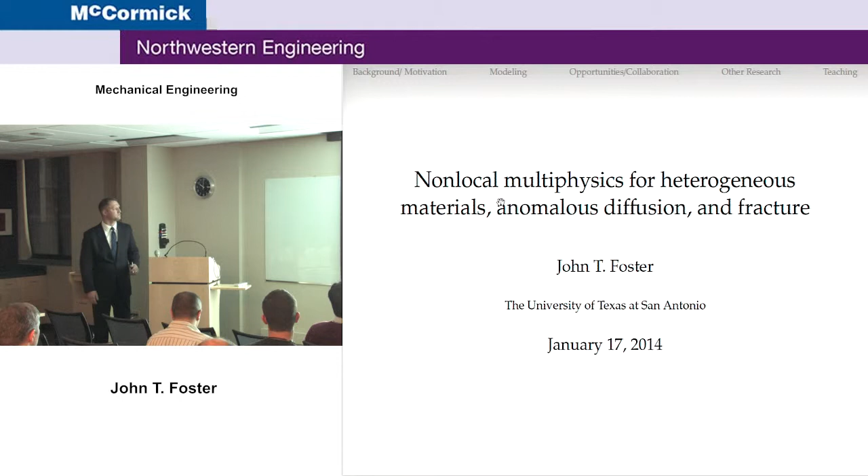I've titled my talk in a way that shows I'm going to focus on the science, but the science is very much motivated by a particular problem, and that's where I'll start. First I'll show the importance of the problem, talk about some of the details we're interested in capturing in our models, and then some of the efforts we're making to do this type of modeling. So that's the outline of my talk.

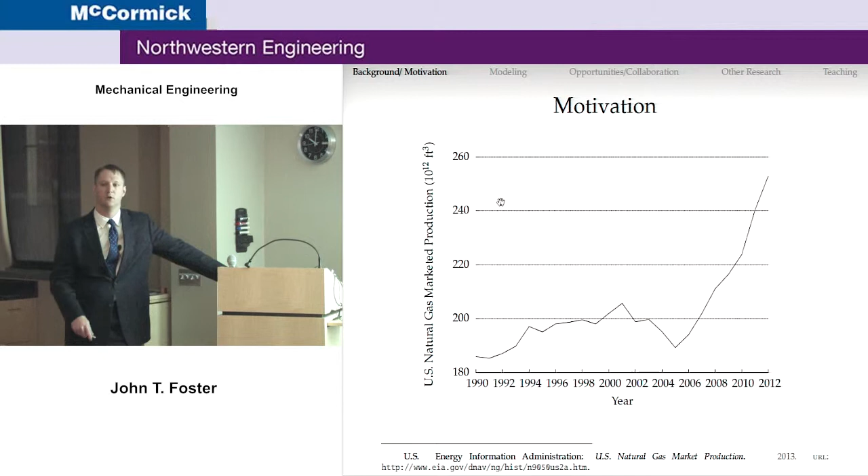The motivation here is this picture of natural gas production in the United States over the last 22 years. You can see this sharp uptick in the mid-2000s, and this is just going to keep going. Another way to look at this is in a picture.

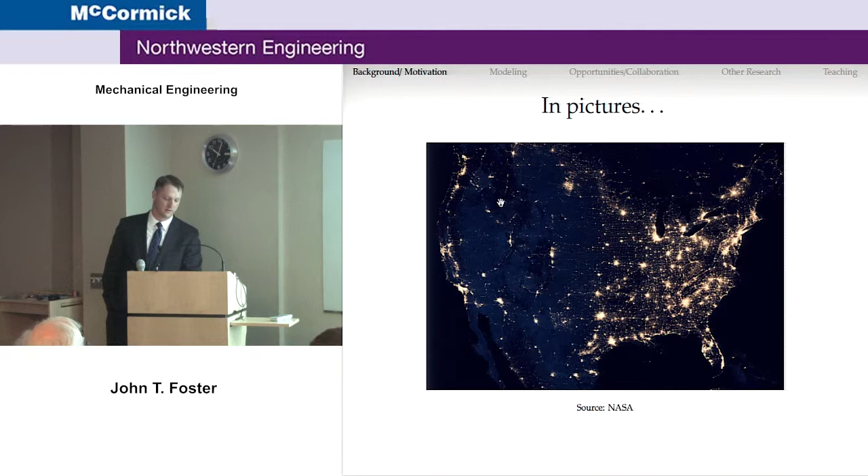So I mentioned shale. Shale is a sedimentary rock characterized by very low permeability. On the scale used in petroleum engineering, they talk about permeability in units of millidarcy.

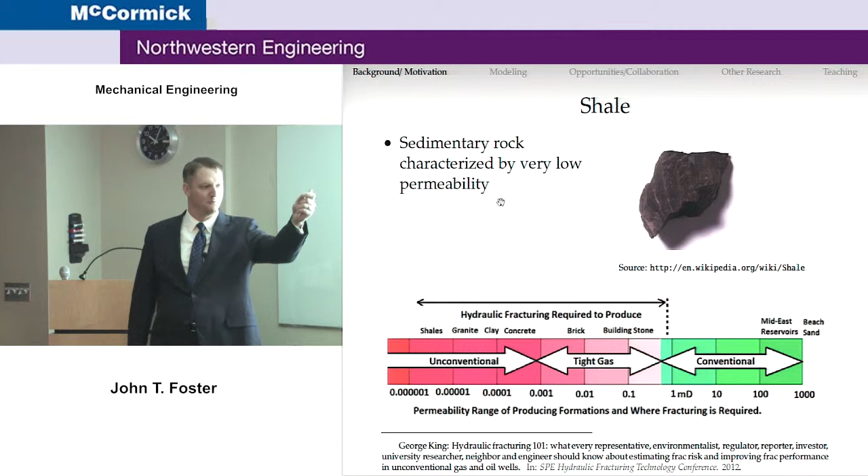It takes 1 year for one molecule to move through shale. So to produce natural gas from these deposits, you have to hydraulically fracture them. Hydraulic fracturing is a process of initiating and propagating fractures by pressurized fluid. It's usually water. Most shales respond quite well to mostly water, about 98% water.

However, there are other things you can hydraulic fracture with. In fact, one of the new technologies is hydraulic fracturing with compressed or liquid natural gas. The benefit there is when you turn the well into production and flow it back, there's no water in your natural gas. You put it right in the pipeline and sell it. So there's a lot of new technology being invented.

The actual process is combined with horizontal drilling. From a wellhead, they'll drill down. The Eagle Ford Shale in Texas starts at about 4,000 feet in the ground and goes to about 14,000, so you're talking about a couple of miles in. They go down about 2 miles and then go out, sometimes a mile, sometimes 2.

The actual process is that they go to the end, called the toe, with the heel at the other end, so it looks like a foot. They go to the toe and perforate the wellbore. The wellbore has steel casing, so they poke holes in it, usually with shape-charged jets. They pump the fluid in at high pressure, which takes several hours to build up.

Typical hydraulic fracturing takes multiple days to complete a well. They build up the pressure and produce fractures, then move up the wellbore, plug it off, and do it again, repeating this process. They call these individual portions stages. Sometimes a single wellbore might have as many as 100 stages, though typically it's probably more like 30.

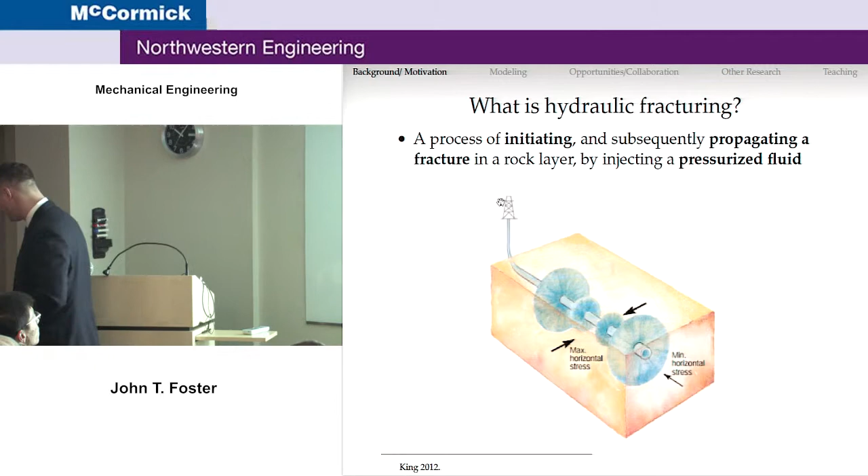I'm going to talk about natural fractures. We know that hydraulic fractures are influenced by natural fractures, and we've known this for a really long time. If we go back, some of the most important experiments ever done in this regard were done by a guy named Norm Warpinski, who was at Sandia at the time. He worked in the geology group there.

They went to the Nevada test site, probably the only place in the world you could do an experiment like that. They actually drilled an oil well, just like they would, 2,000 feet into the ground, and did a hydraulic fracture. Then they used the tunnel complex at NTS to mine back to the fracture in situ. There were tunnels already there, so they mined back to them. That's why they call them the mine back experiments.

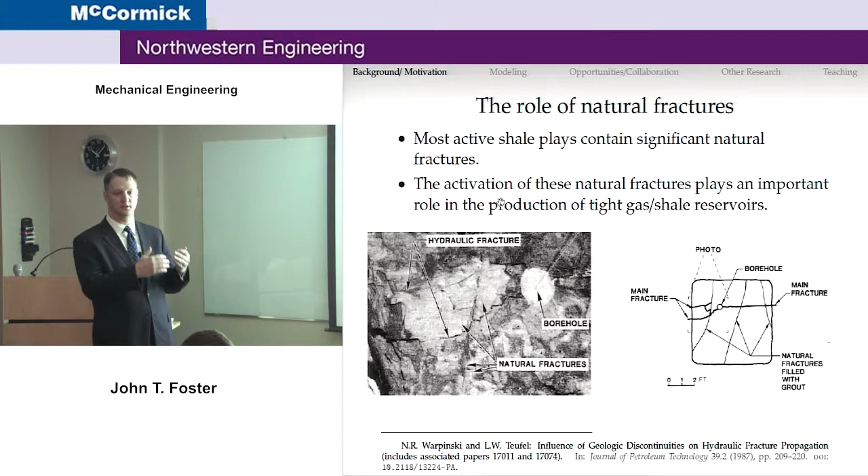These are well known in petroleum engineering. They mined back to them and got a picture of what the hydraulic fractures look like in situ, which is pretty neat. This isn't a very good picture unfortunately, it's from an older paper, but they have the schematic showing that from the wellbore it starts off as a bi-wing fracture, but this fracture interacts with a natural fracture in the rock, what a geologist might call a joint. Fluid pressure leaked off into this natural fracture and produced a secondary fracture.

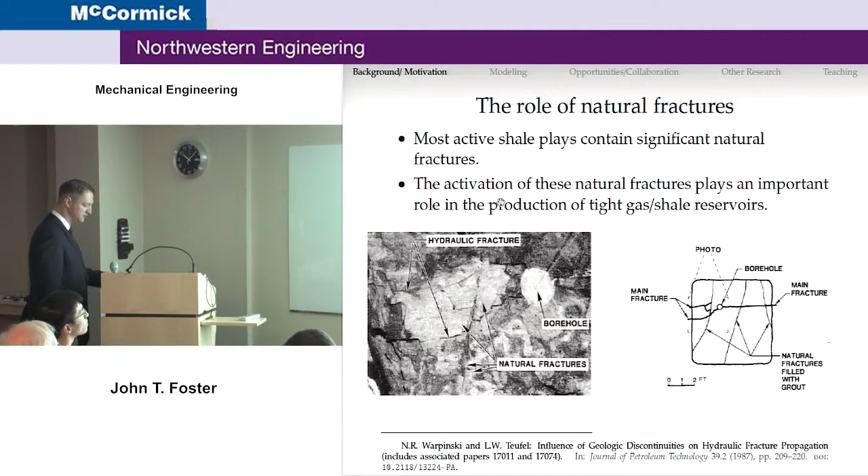Fast forward many years, 2013, same author. He left Sandia in about 2000, started his own company called Pinnacle, which was later bought by Halliburton. So he works for Halliburton now. He's very well respected in this industry.

This is becoming more common. In fact, it actually helps a lot with environmental concerns. There's a lot of traffic generated by these hydraulic fracturing events. So if you can localize them, set up one spot, set up an environmentally friendly place, contain any contamination, and do it all from one spot, it helps. It also confines the road traffic and other things, and the oil companies can help build roads to those areas.

Nowadays it's common to drill as many as 10 or 11, but maybe up to 30 wells from one site. So these will be going out in radial directions all around, 30 of them.

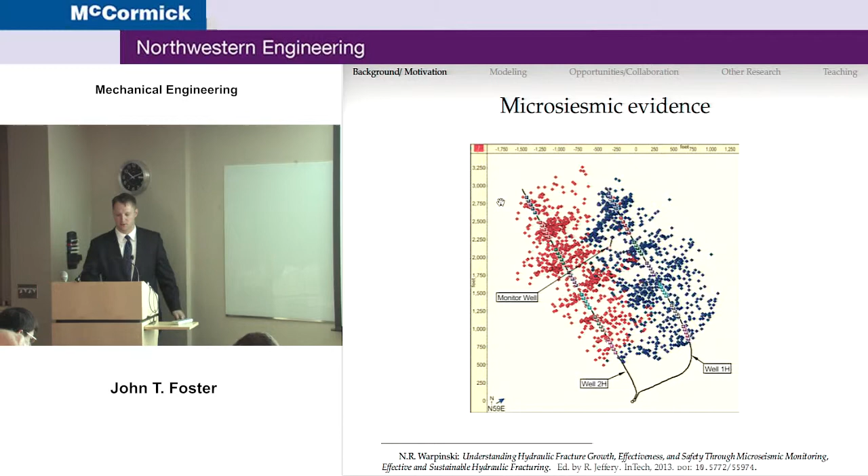Some of the current modeling techniques—and when I say current, I'm mostly talking about what's used in the industry, not in academia—are pseudo 3D methods. They're essentially 2D boundary element type methods where the fracture height is basically implicit, or accounted for through an analytic model. They use a lubrication model for the fluid in the plane of the fracture, and basically linear elastic fracture mechanics to add elements as the fracture propagates. Then they also use what they call a stress shadowing technique.

These are analytic solutions that can give you some sense that there's another fracture nearby and influence the propagation. But what they can't do is account for any heterogeneity in the field. By heterogeneity, I mean heterogeneity in natural fracture frequency and orientation, heterogeneity in material properties, and heterogeneity in permeability and porosity of the rock. By material properties, I mean solid mechanics, strength of the material.

Here's a study done by a colleague at UT Austin, Petroleum Engineering, where these are all common codes used by oil companies. Some of them are very explicit, like Marathon's own code to predict hydraulic fracturing events. Which one is correct? They're vastly different predictions for the same set of experimental data they were trying to compare to. They were all given a set of parameters and asked to predict it, and you see fracture lengths differing by over 2,000 feet, half a mile difference in the predictions. These are all basically pseudo 3D codes.

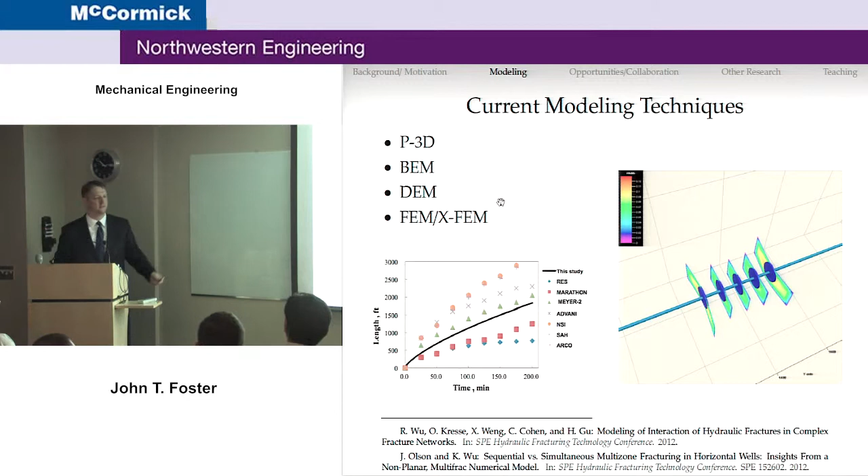So these are some characteristics of the hydraulic fracturing model for the problem I'm interested in solving: at reservoir scale, interaction, competing, non-planar fractures, where they compete and are influenced by other fractures at different stages and possibly different wells. That's what I mean by reservoir scale.

So heterogeneity, I already talked about that a little bit. Non-planar fracture models, fluid mechanics, and heterogeneity here - this is what I'm going to focus on. But my group works in all these areas, plus some other practical aspects.

We're interested in building realizations of very stratified, complex geology, and having tools that make it easy for us to do that. So we're talking about meshing - you might have tight pinch-outs in geology, and if you need to mesh that with traditional finite elements, it can become difficult.

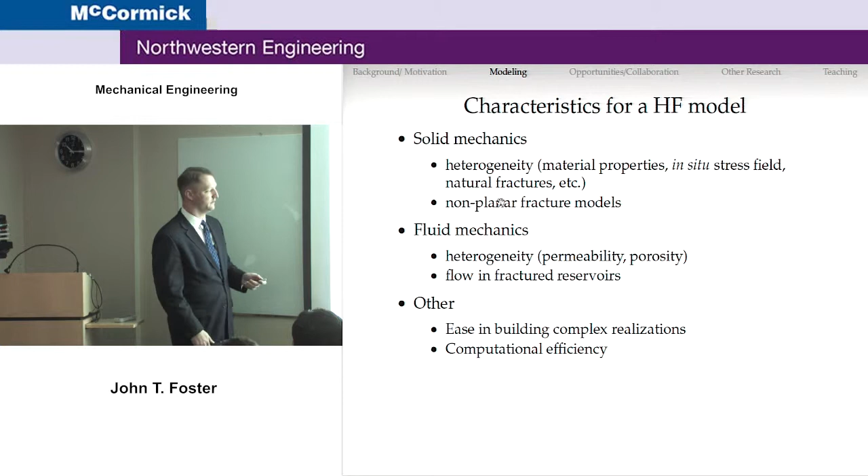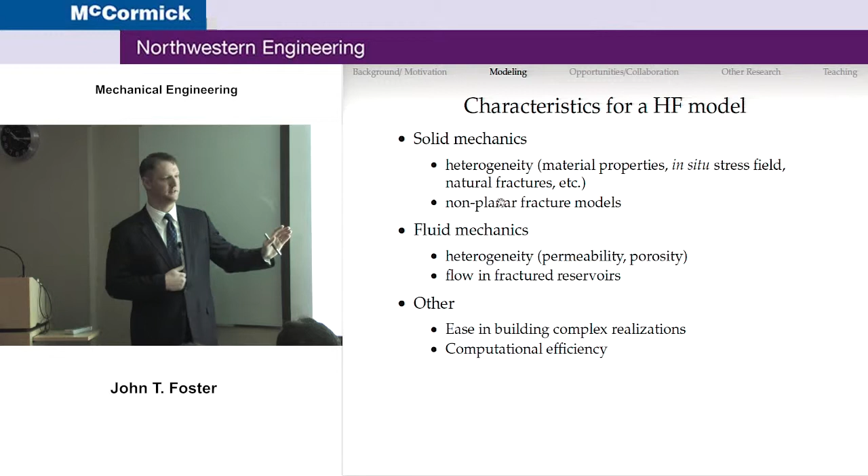Computational efficiency is certainly a relative word. What's computationally efficient to me, after spending 7 years at Sandia, is not computationally efficient to someone in the oil industry. I can tolerate simulations that take a week on 1,000 processors. A guy at an oil company cannot - he wants an answer in a few hours, at most maybe one day.

I'm going to dig into the modeling a bit to show you a model we developed to handle diffusion in this heterogeneous media - it's a non-local model. The non-locality comes from heterogeneity that we're going to exclude. There are multiple types of heterogeneity: there's really small heterogeneity, small fluctuations in permeability, possibly micro cracks that fluid's going to flow through, and we're going to exclude those - that's where non-locality comes in.

But then there's large heterogeneity - things we want to see, like the major faults, the big fractures. We want to see large changes or discontinuities in diffusion across large stratified geology. So we're going to develop a non-local model.

Let me show you how I developed that. We're going to start with the classic diffusion equations, Fick's law, just to get it out of the way since I'm not really going to do anything with it - it's going to be along for the ride. This term here you can think of as a source term, and this is a sink of a diffusing concentration U away from a point X. I'm just going to accumulate those together, move it over, create a new variable f(x), and put it there.

And then I'm going to develop the variational problem. If you're a finite element guy, this is a weak form - very standard. I'm going to multiply through by the virtual variation in U, integrate by parts, shifting some of the differentiation onto the virtual variation, and therefore weakening the continuity requirement of U.

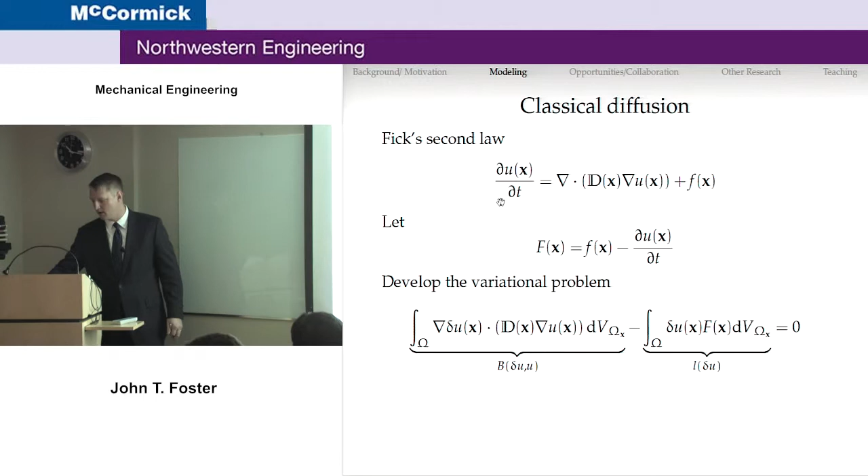This is the so-called variational problem, where you have a bilinear function and some forcing term. I'm going to exploit the bilinear nature of that first term, being that I can replace either of its arguments with itself and then just pull a 1/2 out here.

And if I do that, then because it's bilinear, I can pull the delta operator outside. And from that, I can infer a quadratic functional. So this is a quadratic functional of that diffusion, classic diffusion equation.

A lot of people in this community aren't used to seeing this. If you're a finite element guy or solid mechanician, the analogy is a potential energy function - we're all used to seeing this. My colleagues, when I showed them this, they'd never seen it, so I had to work through the development.

So I'm going to take this term - this is the one we care about. I'm just going to call it Z, a flow potential if you will. So I'm calling that Z, and I'm going to put it there. Now remember, U has a continuity requirement here.

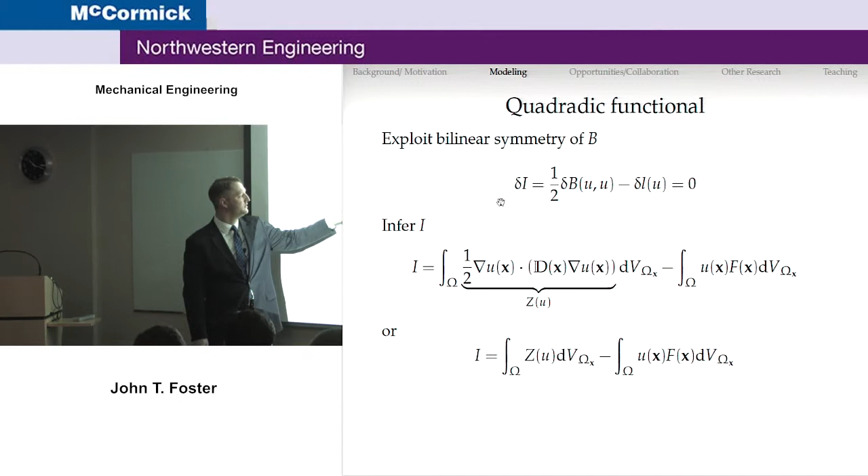So U is local to X. It depends only on X, and derivatives of U must exist for this equation to be valid. And I want to remove those restrictions.

So I'm going to remove locality. I'm going to say, okay, now I have a new Z, I call Z bar. It's not just dependent on X - it can be dependent on points remote from X.

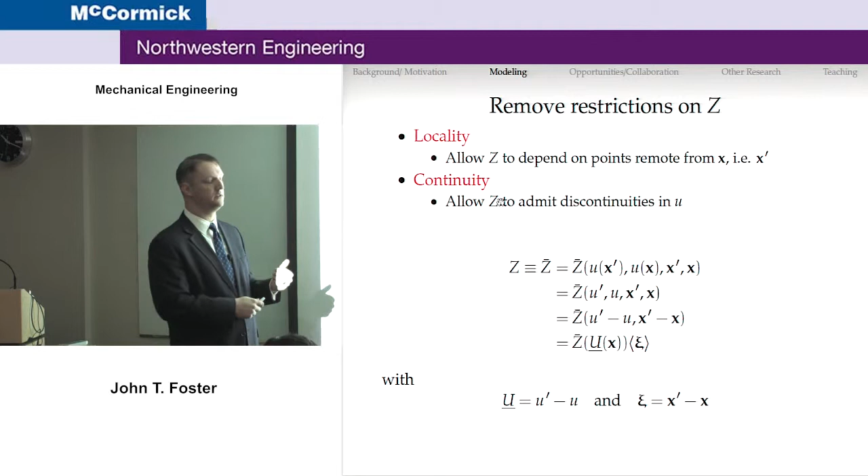And I'm going to remove the continuity requirement. I'm not going to say that derivatives have to exist, because the diffusing concentration across an interface from one region of one permeability to another is going to be a discontinuity in the diffusing concentration.

So when I remove those restrictions - this is just some notation - U is a function of X prime, and I might write that as U prime. Then I might say that Z is a function of U prime minus U and X prime minus X. And I might replace U prime minus U with this thing I'm going to call a diffusion state, if you will.

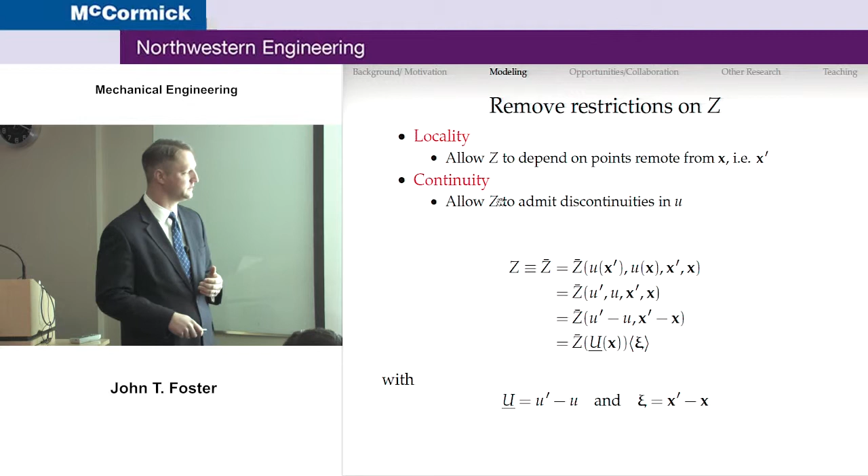This is just some notation, and if I need to disambiguate, I might use this notation just to say that this diffusion state is associated with this vector, X prime minus X. And I'm going to go the other way.

I'm going to minimize that quadratic functional now with my new Z that I've removed the continuity requirement on. So I minimize the quadratic functional. And when I do this, this is what I want to bring attention to.

Because of this function space that Z now lives in, because I've removed the continuity requirement on it, you get this term in solving for the first variation of this Z. This is an inner product on this function space of the Frechet derivative of Z and the first variation in U. So this new integral pops in.

That's an integral over x prime. And then I'm just going to manipulate it a little bit further, and I get this equation. Of course, I has a stationary value when the first variation of I is equivalent to 0. So then for arbitrary variation in U, this term here in parentheses has to be 0.

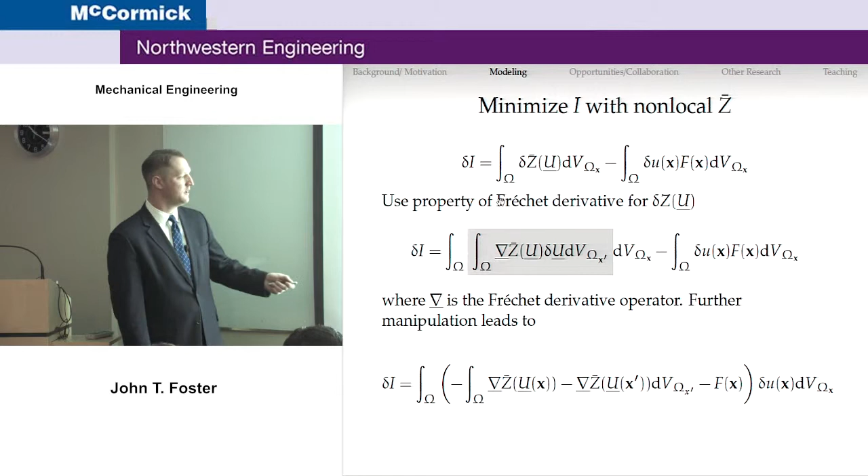And so that's what I have here. I'm just going to replace the notation, so I'm going to say that Q, which I'll call a flow state, is a Frechet derivative of Z. And then I'm going to undo what I did earlier, and now I have this as my non-local diffusion equation.

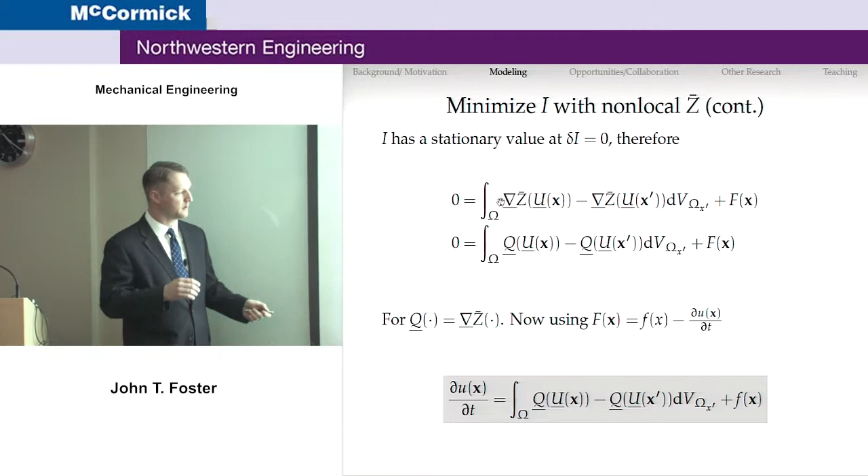So two observations on my non-local diffusion equation. The first one is, in the local limit, when my non-locality shrinks to nothing, I can recover the classical model. So Q is essentially the constitutive response of the material.

So if I propose the constitutive model to be a diffusion tensor D times, here I'm approximating the gradient using a moving least squares approximation - I could show that this approximation is exact for a linear profile in U. And so if I plug this in, then I'm going to say that it's 0 outside of some length scale delta.

So whenever that x prime minus x is equal to or larger than delta, it's 0 - there's no influence.

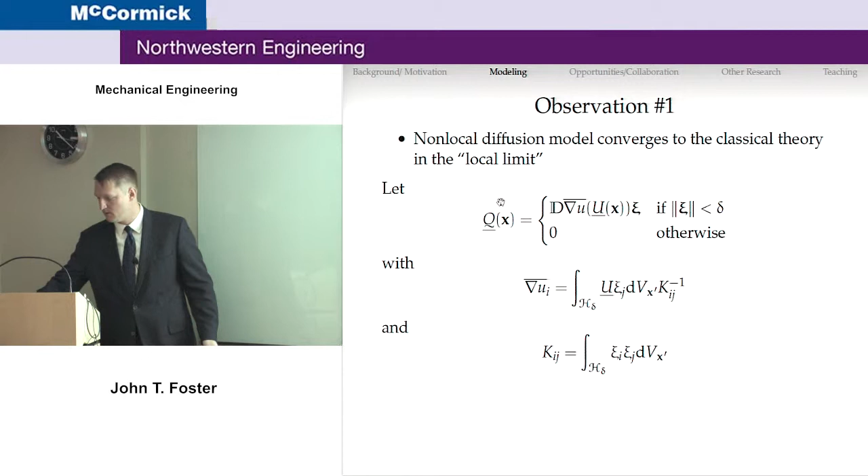So I'm going to use that constitutive model. I'm going to Taylor expand the gradient of U at x prime, about the point where x prime equals x, because I'm interested in seeing what happens when non-locality goes to 0. So x prime is a point remote from x, and I have x, and I'm going to shrink them. I'm going to Taylor expand about that point, and then it's just plug and chug.

I know there's a lot of equations for a slide. I plan on making these slides available if you want to check me. But it's just i's, j's and k's. You plug it in, and you start working through this integrand. We exploit an anti-symmetry here, so that term goes to 0. And you go, go, go, go, and eventually you end up with this, plus some term that's on the order of delta. And of course, as delta goes to 0, you recover the classical diffusion equation for constant D.

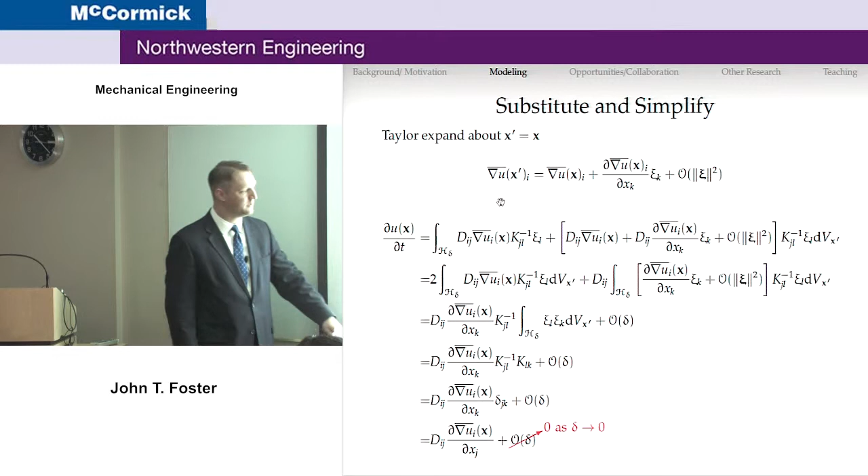Now, it's not much more difficult to actually show the same thing for non-constant D. You have to do another Taylor series expansion about D at x prime, but that's far too much math for one slide. So that's one observation: in the local limit, our non-local diffusion equation recovers the local model.

Another observation: if I choose Q, again this is a constitutive model, to look like this, where C is a scaling constant. The scaling constant depends on, this is a gamma function, it depends on N, which is the degree of the problem - 1 dimension, 2 dimensions, 3 dimensions, the dimension of the problem. And S is something I'll call a fractional order. If I plug that in and plug and chug, the right-hand side, with all those integrals, becomes this.

This is pretty significant because that - I don't know if you're familiar with this literature - but that is identical to the fractional Laplacian operator. And if you go to the literature, say water resources management or people that do hydrology or soil mechanics, this is the standard way to do anomalous diffusion.

So when you have fractured aquifers, for instance, Darcy's law, you can't model diffusion in that environment, right? Unless you actually model every tiny little crack, and you go to that scale. They don't do that. You exclude that, and it results in a non-local model. They use a different model than me - they use the fractional Laplacian - but the model that we've developed here shows that the fractional Laplacian is a special case.

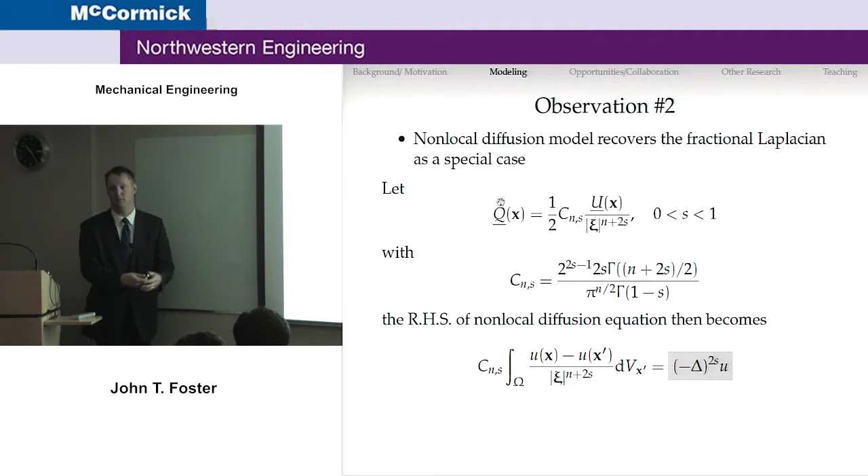And the real way you show this is in the Fourier transform. You take a Fourier transform of that, take a Fourier transform of that, they're the same. So everything I've done up to now is just math. I wanted to strip off all the units to not complicate things, but now I'm going to put the units back in and we're going to do some engineering.

So this is just the same equation, the classical mass transport, fluid transport in a porous media. This is flux here, this is Darcy's law. This is only valid for small compressibility C, the fluid density rho, and viscosity mu. This is a permeability tensor. So the non-local equivalent to that, all the details are in this paper, the non-local equivalent to that is this here.

So if I want to account for higher velocity, that means you account for the transport. Would this work? Not as it's written. For higher velocity, you'd use something like a Forchheimer equation, which would have the flux dependent on a velocity term here. As it's written, it's not modified to do that, but there's nothing stopping that. To do advection diffusion, we could do the same thing - we could develop a non-local model for that.

So we come up with the actual parameters from this by basically doing the same thing. We come up with a generic constitutive model with some scaling functions, and we let it go to 0 so that it approaches the non-local model, it approaches the local model in the local limit, and that's how we parameterize this. But this is the standard local diffusion tensor.

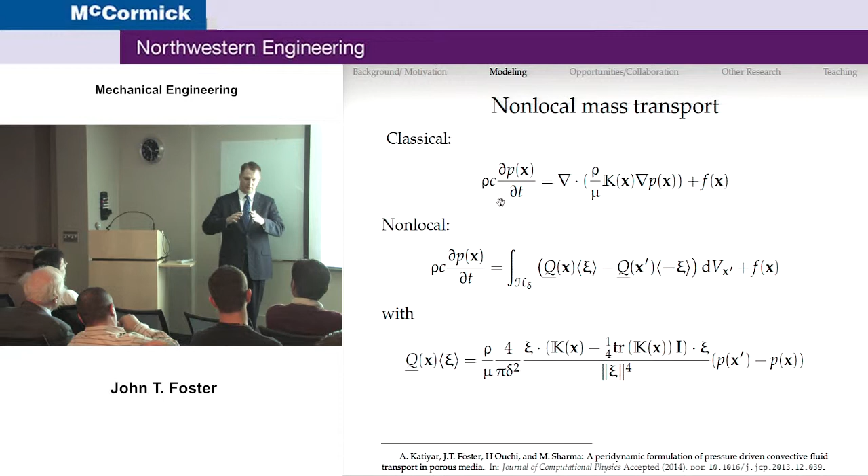Exactly, yeah. We're excluding them from the model, but they're implicit in the non-locality because they cause dispersion.

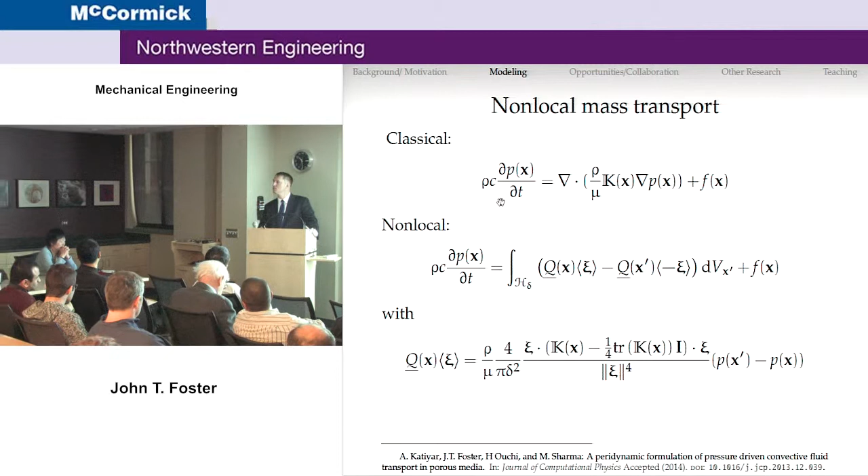So the real challenge is that you have a continuum model. Yes. And all the processes you're talking about here are below the scale that resolve in a continuum model. Yes. So how do you relate the continuum properties to the scales you're explicitly resolving? Because that coupling is really critical in establishing that continuity.

That's a hard question, I know. I wish I could say you go to the lab and you do these experiments. It comes in the length scale of the non-locality partially. And you know, I get this question a lot because I have an integral, and there's my length scale. And so people say, well, how do you come up with that?

But I never read the fractional Laplacian, I never say, well, where do you come up with the fractional order? Because it's the same thing. The fractional order determines the length scale. I've never heard anyone, and maybe people don't understand it well enough, but I've never heard anyone say, how do you determine that fractional order from the material properties?

It's fit. It's fit, yes. Same thing here - in theory, you can take your delta small enough to look at all the details. So that's a large scale problem.

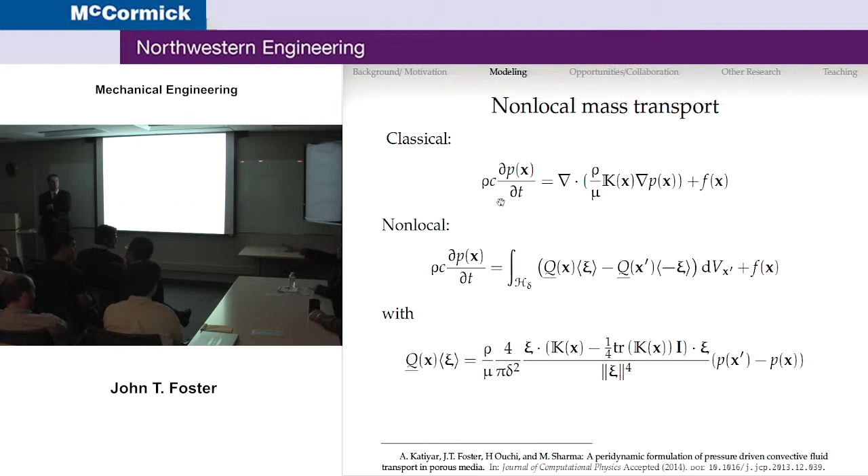My colleagues are petroleum engineers. I work with them on this, and this is a problem that they wanted to solve. So this is a common problem in petroleum engineering.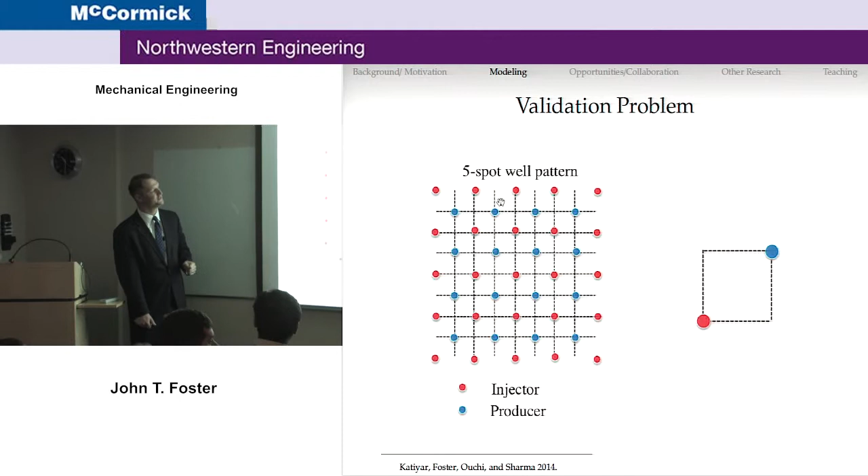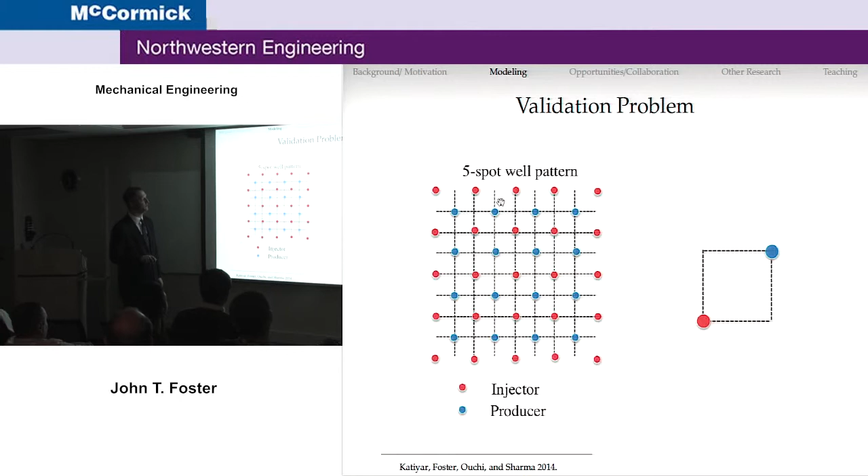They use blue for producer - that's my well, good point. So in the interior here, if we look at the interior well, we can use symmetric boundary conditions along the edge, and we can only look at this kind of one block. So we use symmetry boundary conditions along the edge.

It turns out there's an analytic solution, an analytic local solution. One of the problems with these non-local models is it's hard to get analytic solutions - very hard. It's a very small class of problems you can do that for. So typically when we code it up, we want to verify if we coded it right, so we have to go back to the local solutions to do that, the analytic local solution.

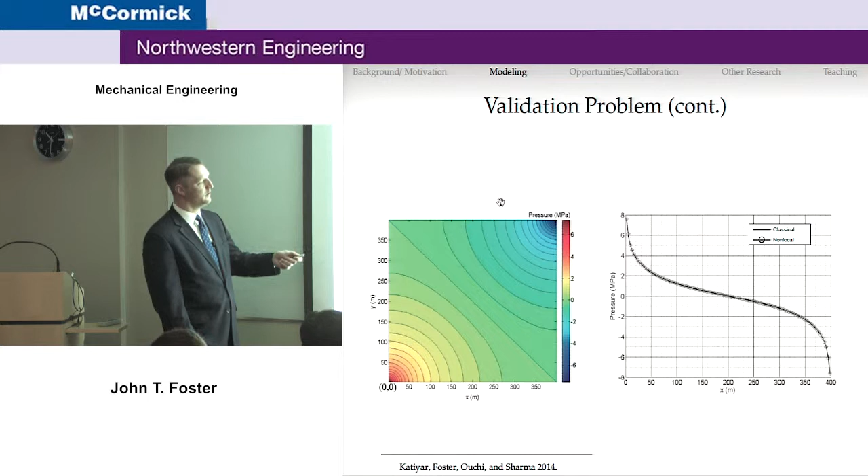So there's an analytic classical solution of this problem. This is the pressure, across the diagonal here. There's an analytic solution to that. And if we coded our non-local model and we shrink the horizon, or what I'm going to call the non-locality, to nothing, then you can recover the local model. So we coded it up good.

But here's another interesting feature of the non-local model. If I take a block and just stick it in there with zero permeability - so you have a regular porous media out here, and an impermeable region right there - and I solve the same problem, I don't change a thing except putting in the material properties where there's zero permeability, and where there's another permeability value. Without any interface condition at all, I recover...

You can see the sharp discontinuity. So this is pressure along this axis now - the pressure, and then it instantly drops to zero along the boundaries of that.

It's too much math to show, but we can actually show that this non-local model, the two-domain non-local model, converges to the two-domain local model and the interface condition, and the boundary condition. The boundary condition is implicit in the non-local model - it's continuity of flux, a continuity of flux across this interface right here.

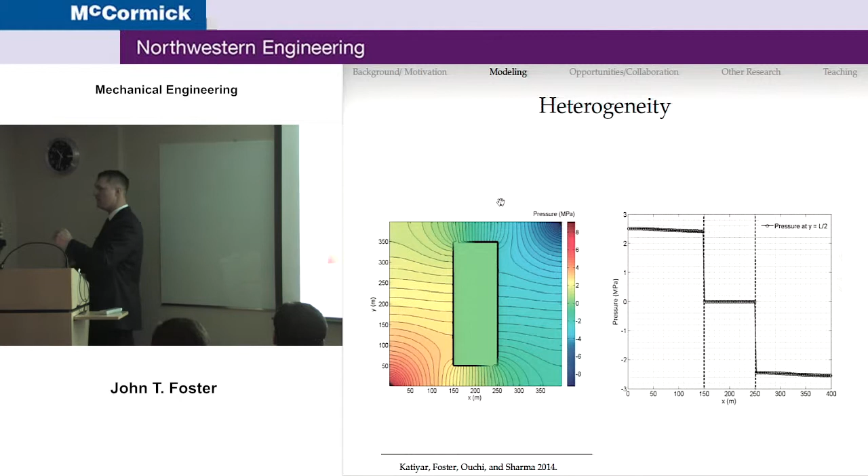So this is how we can, with this non-local model, capture large-scale heterogeneity. Large-scale heterogeneity would be large things that we're not excluding now. We want to capture a discontinuity and diffusion across this interface because it's large - it's a large stratified geology or whatever.

Briefly on the solid mechanics, we have a very similar formulation for the solid mechanics model. We start with a Hamiltonian, again, where we have a strain energy density functional that is not dependent on gradients - it's dependent on the true deformation of x prime and x. The Euler-Lagrange equation associated with this is this equation, sometimes called the peridynamic equation. What you have is where this t is a Fréchet derivative of the strain energy density functional. This can be derived from a variational principle.

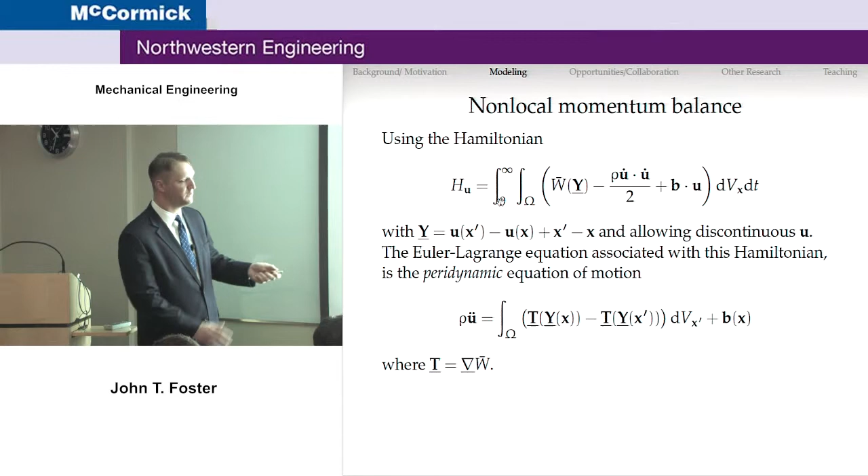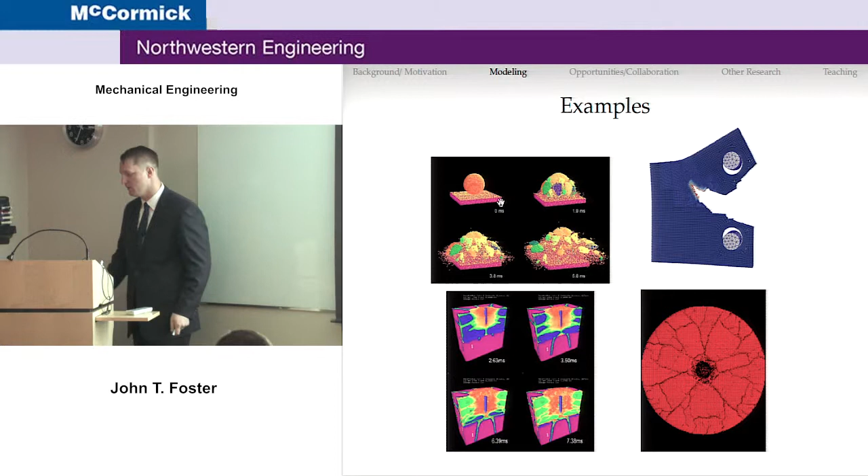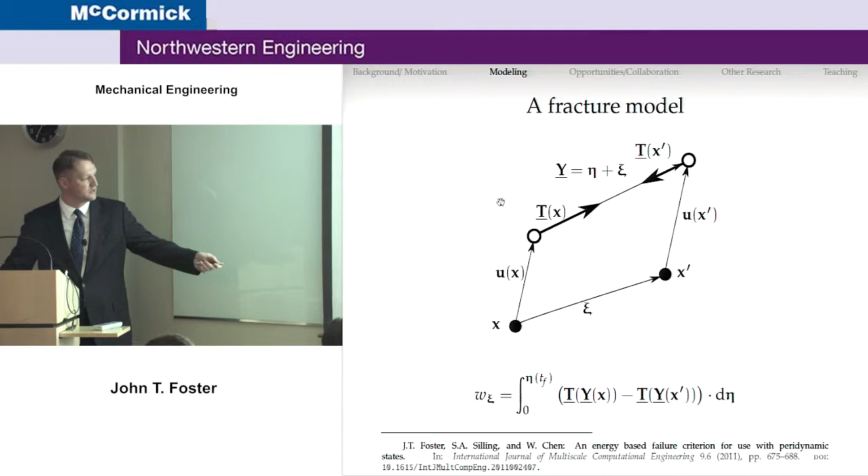Because we can define a force density associated with each pair of points, x and x prime, when we displace those points, there's work done that's associated with that bond. It's an energy density, okay? So if we integrate this over time, then we have some energy density. The units of this are energy per unit volume squared. So we can track this over time and calculate the work that's continually done by displacing those points.

And if we consider a point A that lies along this line that goes from 0 out to some length scale delta, and all points B within this spherical cap—this is in 3 dimensions, and the surface there is of unit area. So the surface that's being cut here is of unit area.

If I assume that every point A and every point B has some critical energy that at some point, for some reason, will be irreversibly removed or broken, if you will—it has some critical energy.

Well, the total energy, if I integrate all that up between all interactions B and all interactions A, that is the total potential energy required to open up a new surface of unit area, or the strain energy release rate. So if I compute this integral, putting WC in there, compute this integral and equate it with G, I can solve for this critical energy of a single interaction in terms of a fracture mechanics parameter.

So then, of course, if you want to do plane strain fracture toughness, if you have a plane strain, you can plug it in and use fracture toughness instead of strain energy release rate, and therefore we have a way to define how much work can be done on a bond before it will fail, a bond being a point A and B. I don't like that word bond because it seems like a spring, but it's...

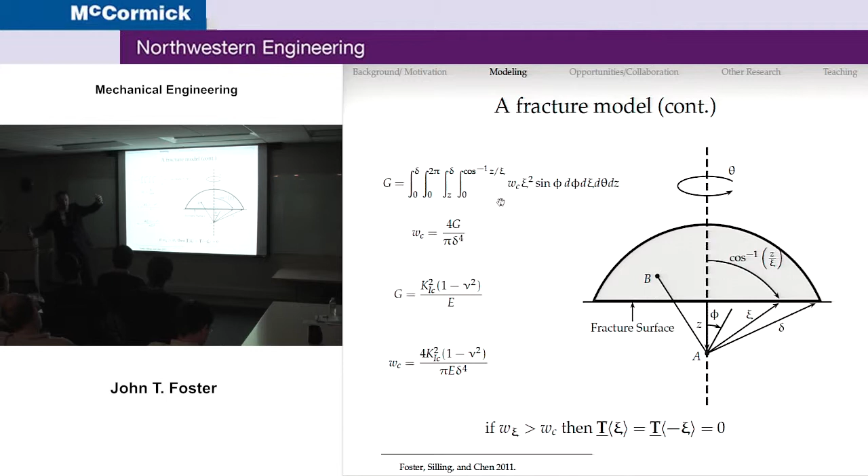We need pressure-dependent material models. We need more complex fracture mechanics. We need fracture models that can predict competing fractures when you have large process zones that interact with each other. This is just a model for proof of concept that I'm going to show you today. This model actually has been compared with experiments for metals, and it works really well, where linear elastic fracture mechanics applies.

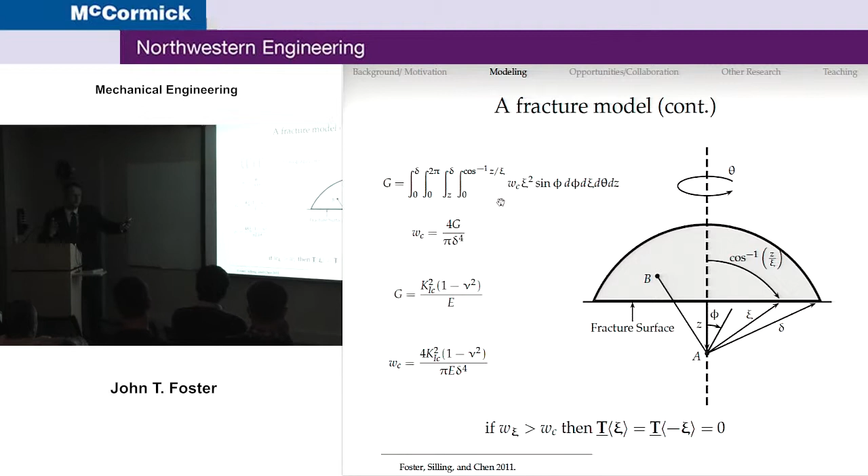This is standard. What it results in is something that's very analogous to standard Biot poroelasticity. And then, of course, when I add this additional pore pressure, it might cause additional work to be done, and those interactions might fail, causing some failure. We can characterize that failure through a scalar damage variable, which is basically the volume fraction of interactions—the ones that are failed, or rather, the interactions that have been removed.

So one way to think of it is in a discrete setting. If you had 100 points that were interacting and you removed one, you have 1% damage. Now, damage doesn't necessarily mean there's a crack there. Cracks occur through the coalescence of damage in a natural way.

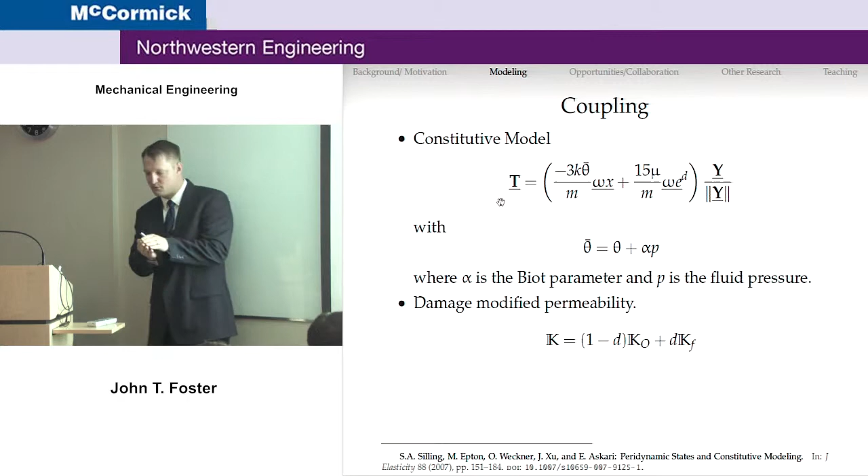So we're going to modify the permeability tensor in the damaged regions, and right now we're using just this linear modification. Again, this is an area of research. I think we're going to have to go to experiments. This is an empirical model. We'll need experiments and higher fidelity simulations of small-scale cracking and fluid flow to get this correct.

The discretization is kind of easy. We replace those integrals with sums in a discrete setting, which results in a particle method. In some work I've done with one of Professor Liu's students, Professor Belytschko, and Professor Liu, we've shown that this discretization for solid mechanics, under certain assumptions, relates back to or is equivalent to classical mesh-free discretizations, namely continuity in the displacements, which I removed that restriction initially. But if we make that assumption and use first-order polynomials in RKPM, you can show they're identical.

This method is currently implemented in these codes, DOE codes. I've worked on all of these. I have code that I wrote in all of the distributions of all of these codes. Most recently, I'm working on this code, which I'll talk about later.

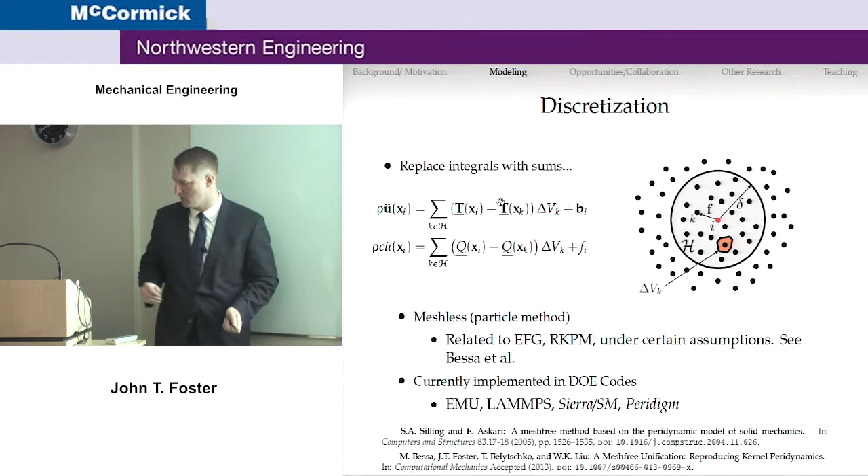Let's show an example. This is an anisotropic permeability, contours of pressure on the left, damage on the right. You see fluid pressure here, pore pressure, and basically crack propagation there. This is an anisotropic permeability field, so the preferential orientation of the fluid flow is in this direction, and you can see that it drives the crack. I have nothing on the crack tip telling it to go in that direction—it's the preference of the fluid to flow that way that's turning the crack.

Is this coupled? It is coupled.

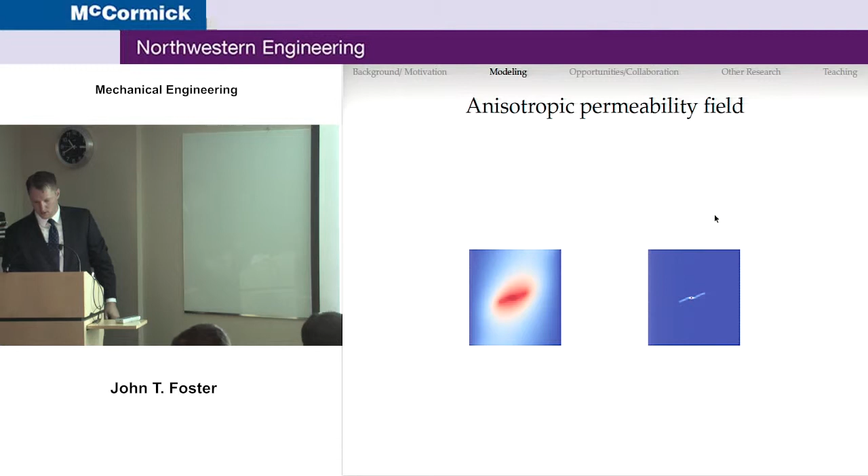This is an isotropic permeability field, and you can see that in the pressure—it diffuses isotropically. But when the crack initiates, the pressure drops because it's driving the crack out. These are representative of natural fractures, discontinuities in the solid media already. Here you can see the crack grows out—if they weren't there, the crack would just go straight in two directions because it's an isotropic field. The crack drives out, intercepts this natural fracture, grows along it for some time, and then continues on.

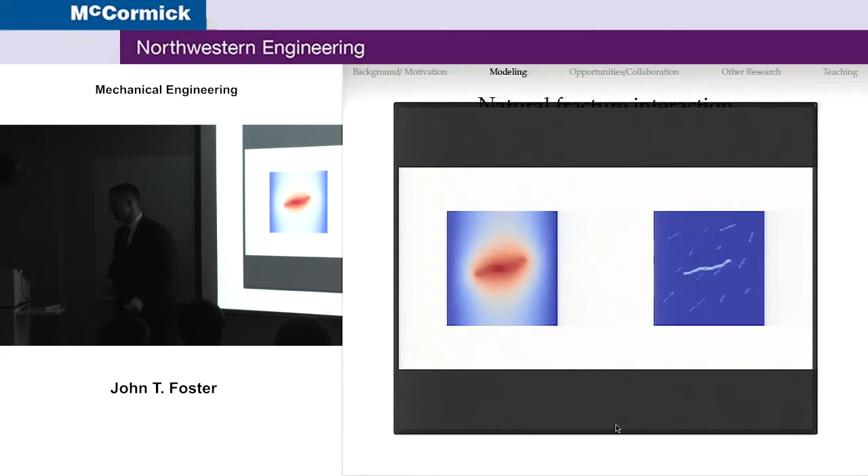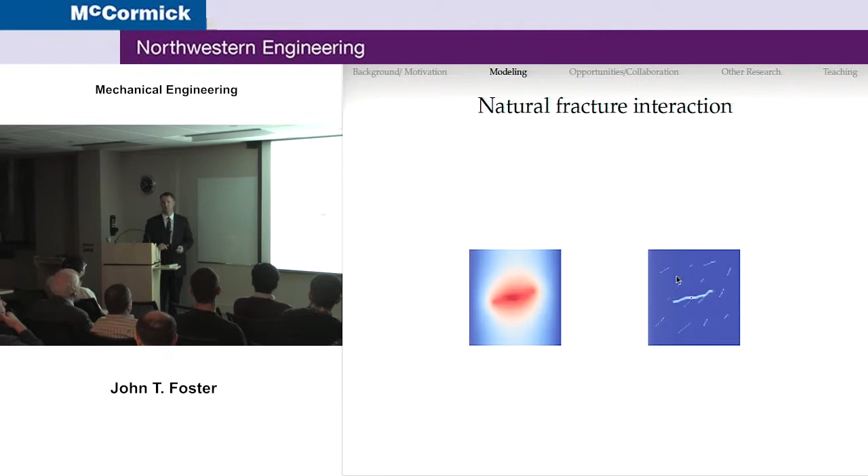Don't they branch? Under pressure they must branch. In this particular model, the material properties in this example aren't physical to shale, so I don't see any branching here, but they could. The calculations do branch in general, which is interesting—I do have a simulation that shows some branching, but not in this one.

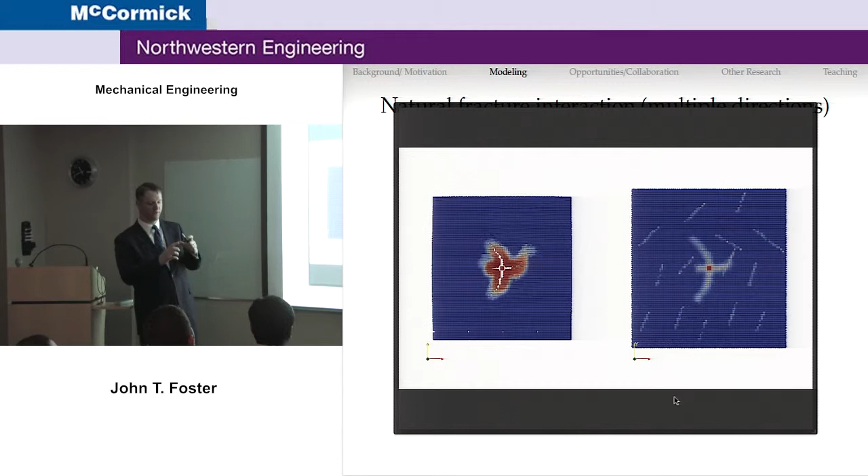So here's a typical perforation, where they perforate the steel casing in multiple directions, and there's no way a priori to know exactly which crack will dominate—it's dependent upon the field. Here you see initially about 4 perforations and then multiple cracks. One of them goes out, intercepts a natural fracture and grows along it, and these are influenced by it. Again, there's nothing turning these cracks other than the interaction with the natural fractures and the fluid flow—I'm not telling the crack where to go in any way.

Is the fluid pressure everywhere on the crack that penetrated, or just in the fluid? Well, this is fluid pressure here—you can see it's highest here, but it's not getting all the way to the crack tip. It depends on time.

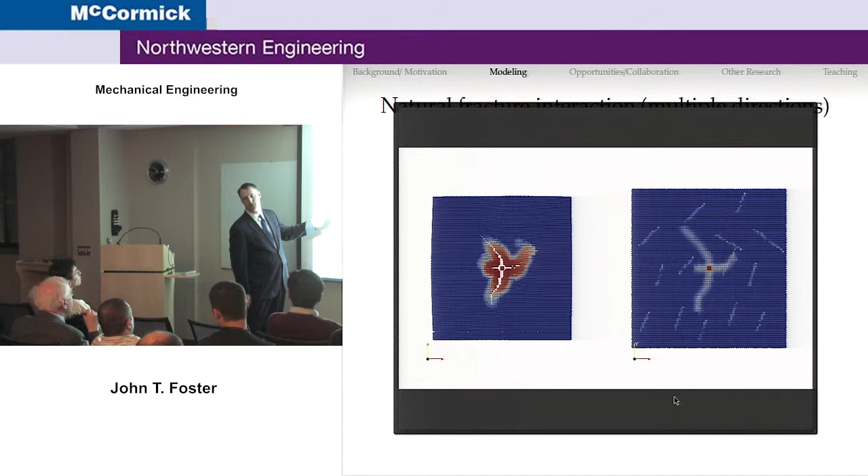So those were 2D simulations done in a small-scale prototyping code we use in my lab. We're in the process right now—the theory is fully developed for 3 dimensions—of putting this into our large-scale code Peridigm, built on top of Trilinos, a code distributed by Sandia National Labs. I've worked on it since I worked there, and I think I'm the only non-Sandia developer for it now, with access to the repository and everything.

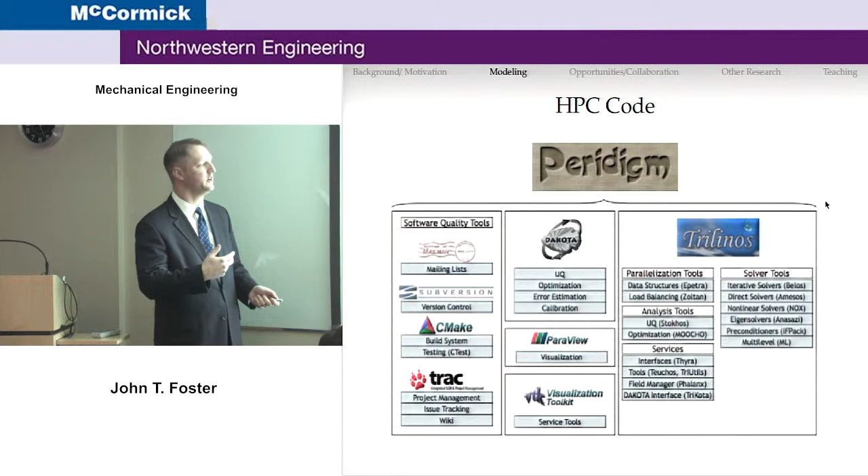So the great thing about it, this is really high quality, production quality code. It scales excellent—I've run this on thousands of processors and got excellent scaling. And the real cherry here is being able to use Trilinos and all the solvers that come with it, all the nonlinear solvers, nonlinear conjugate gradient, all this. It's going to allow us to put more physics in and still be able to get solutions.

I talked a little about it already, but ultimately we want to go to multi-phase fluids, so we want to be able to include other chemistry that's in the fracturing fluid itself. We want to look at oil, gas, condensate in the solid media and see how it's transporting, as well as contaminant transport to do environmental studies. We need to look at slurry transport.

Slurry transport is going to have a viscosity that's a function of the pressure differences as well. This is how we're going to do the proppant modeling, because again, without proppant it doesn't matter—you can produce all the fractures in the world, but if you don't hold them open so they're conductive to the wellbore, you didn't do anything.

So we need better fracture mechanics, mechanics that can handle large process zones. Professor Bažant has actually taught me so much about the process zones associated with long, stable cracks and all these microfractures that cause these very large length scales.

And of course, when you have multiple cracks, they interact with each other. All the energy is not dumping into creating a single crack—it's creating multiple cracks, and I think we need to improve the fracture mechanics there.

I'll just skip the HPC stuff, but we're looking at using new architecture, hybrid parallelization to get faster and faster simulations. This work is funded by National Energy Technology Lab with joint funding or matching funds from this hydraulic fracturing and sand control program. This is how important the sand is—they even named the Joint Industry Program hydraulic fracturing and sand control.

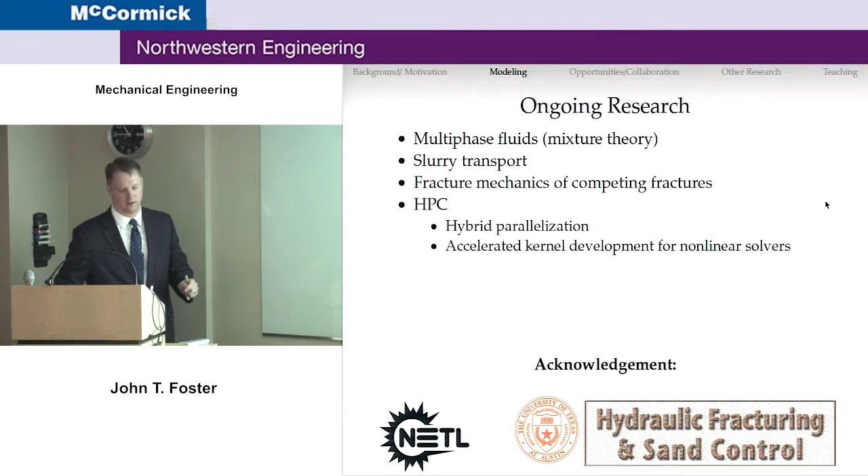So, opportunities for collaboration here, I see quite a few. All of the great people in the TAM group can help me do some better fracture mechanics, and we need more physics, pressure-dependent materials, and other things. Proppant design—I think there's a lot of work to be done here.

So we need proppant that can fill the crack and travel well in the crack but doesn't cake it up. And for material science, we can use synthetic proppants, working with the Northwestern Argonne Institute in a number of ways. There's also a number of uncertainty quantification studies we need to do, based on frequency and orientation of natural fractures and other heterogeneities.

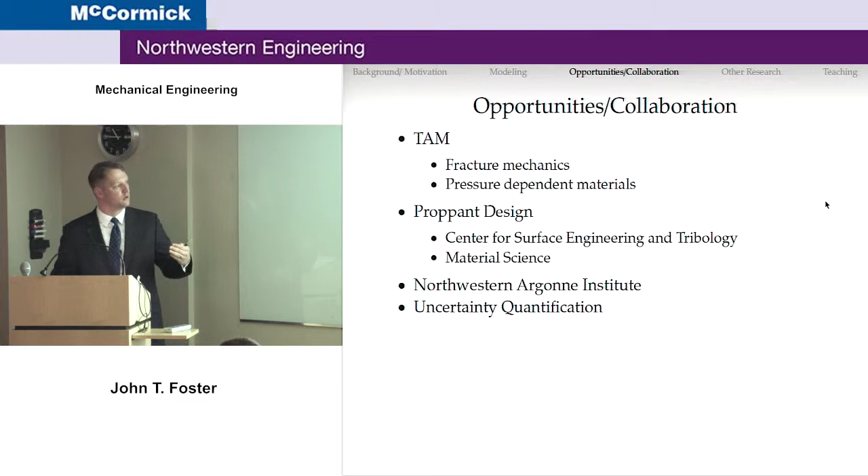I do some other research real quickly. This is just a large-scale computation—many millions of degrees of freedom, run in Peridigm. This is a cylindrical compression, a copper ring compressing sand.

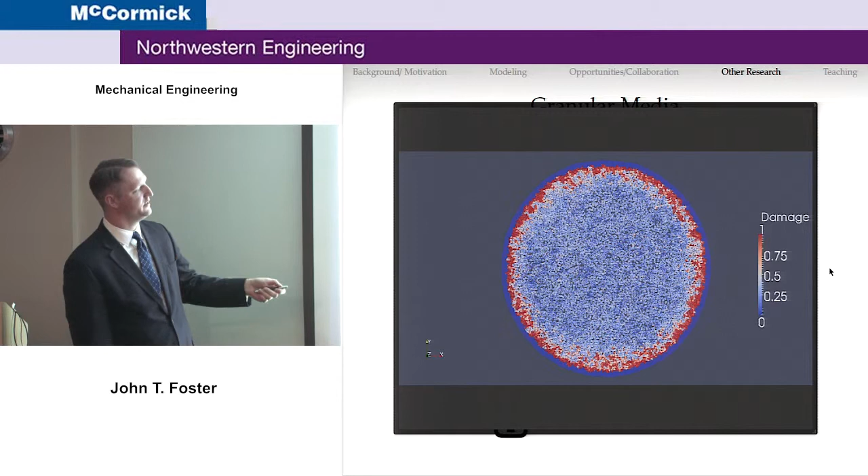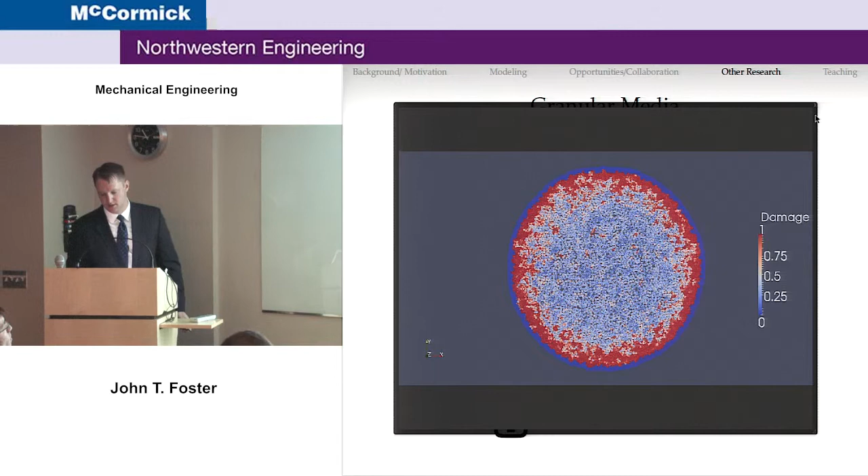And the color contours there are damage—that's not continuum damage, that's discrete fractures. So we're modeling thousands and thousands of discrete fractures, and the simulation is holding together and running. This is just an example of large-scale fracture. I do this work with Sandia—they do the experiments, I do the simulations.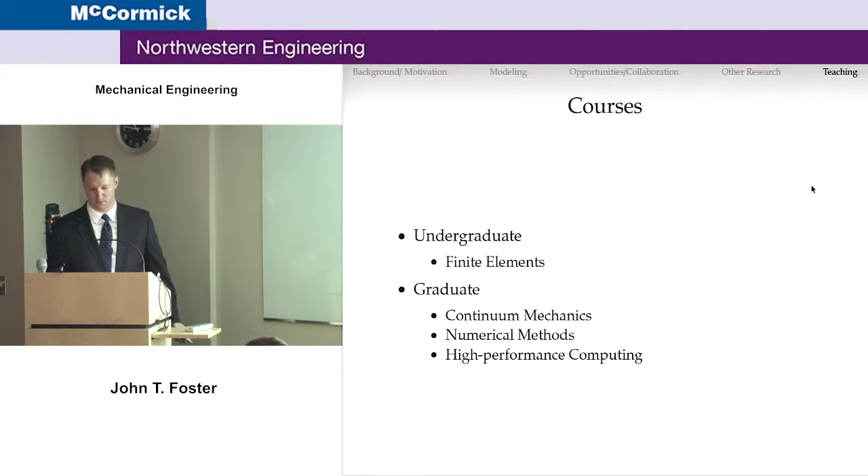So I flipped the classroom—there's a lot of talk about flipped classrooms, right? What I do: I've recorded about 60 lectures on these high-performance computing topics, everything from the first day, where we start with LS because these guys have never seen a command line. By the end of the course, they're writing parallel programs using MPI—not only MPI, but they're using Trilinos.

I don't know of another course at a university anywhere where they're using Trilinos, which is basically a production quality high-performance computing library. And the way it's conducted, I didn't know if I'd have internet access here, so I just recorded a video of me playing around with it.

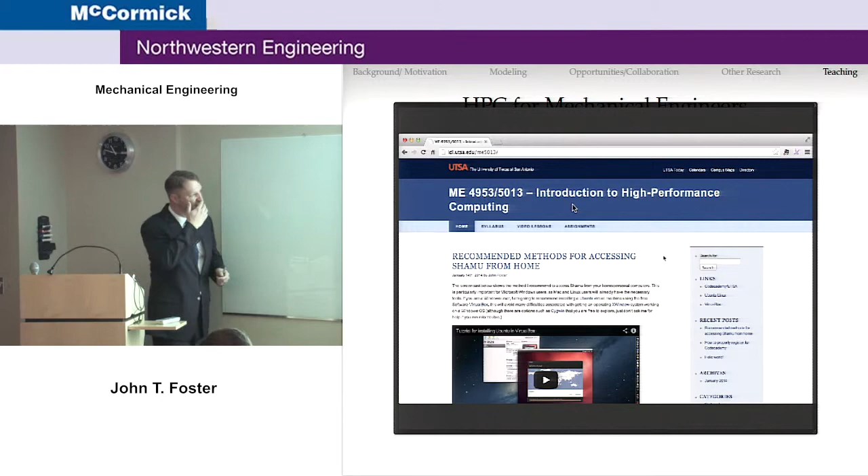Basically, I've recorded these lectures. They're about 10 minutes in length, usually. The students go and watch the lectures before they come to class. I enforce that they do that through a quiz system I've set up.

So I'm just recording myself playing around here. You'll see a student will be logged in, a quiz will be generated from a question bank, they watch the video, and then when they're done, they take the quiz.

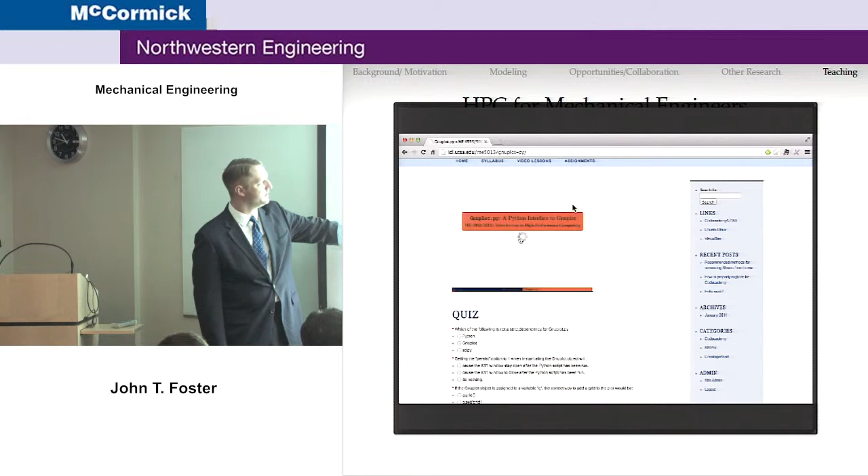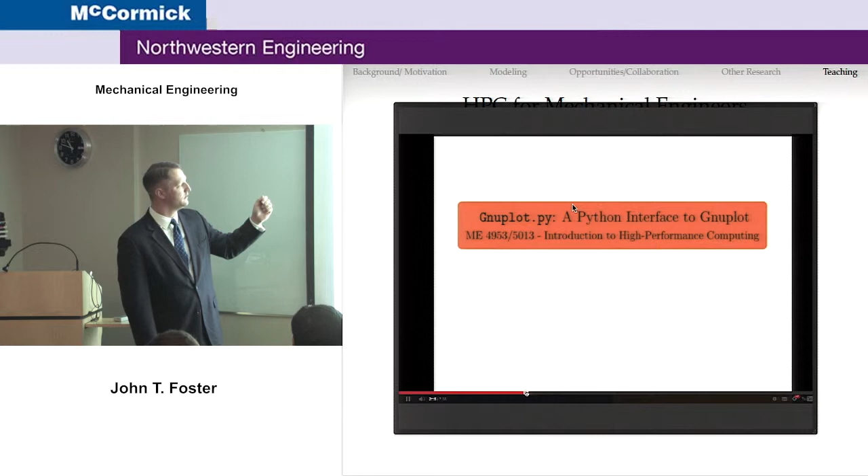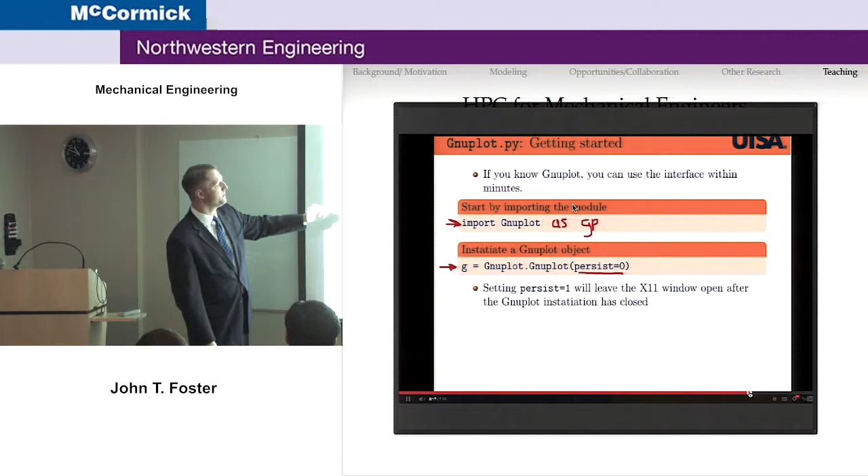The video is a combination of me talking and annotating slides, but more importantly in this setting, high performance computing, eventually I'll get to the point where I flip over to the terminal and actually work examples. So now I'm working examples in the command line, and they get that example.

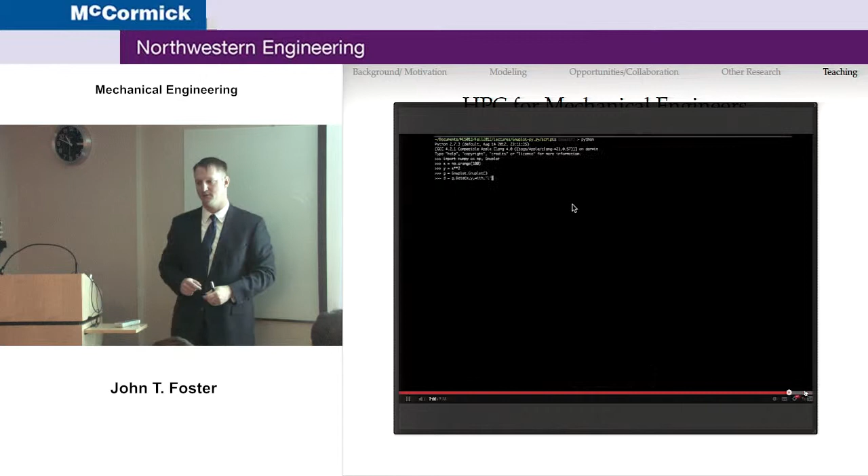Then what happens is they come to class. Class is taught in a computer lab. We all log into a supercomputer on campus, 200 cores, and every class we write a program. Every single class, 25 programs in one semester, plus some projects. Their final project is to solve Laplace's equation.

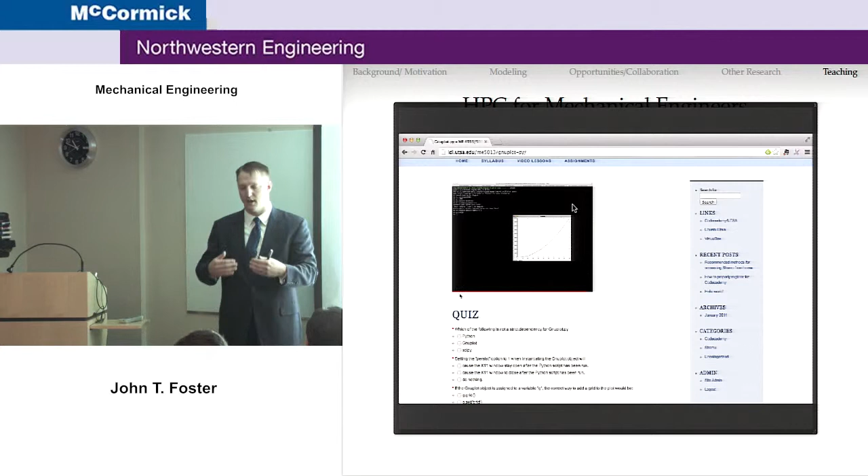25 programs, but the beauty is I'm there to help them. This is basically their homework. They come in, I have an assignment at the beginning of class, they get started on it, and they get stuck, and I help them through it.

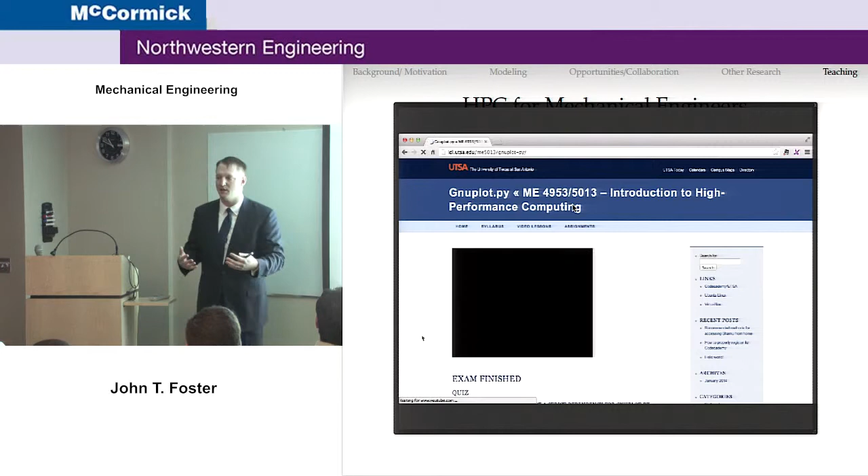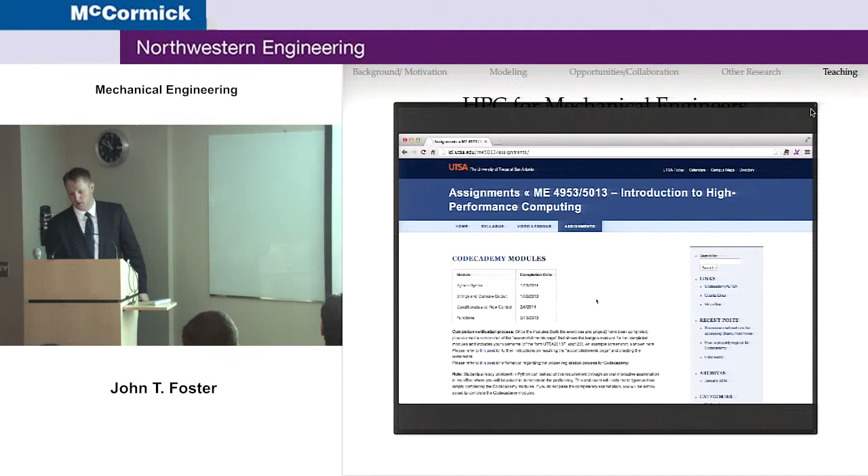And then they have some projects. The final project in this class is actually to solve Laplace's equation in parallel using this Trilinos massively parallel library, and undergraduates do it. So this class has really taken off. It's packed, it's full every semester, only limited by the number of seats in the computer lab because of the way it's taught.

And here's another thing: if they bring their own computer, they can use that, and in fact I encourage it. If you've got a Mac or Linux box, it's really natural just to log in.

So this is an unintended consequence. When I set out to do this, I was actually thinking, well, it'd be a lot of work up front, but once I do it, then it'll teach itself, and I can get back to doing research. That was my thought up front, but this is the unintended consequence.

So here's the unintended consequence: it's established my reputation as an authority on this subject matter, and I get emails all the time about how do you do this, how do you do this. So the teaching has brought people to me for research, and I think it's really kind of neat. I didn't have this master plan, it just happened that way.

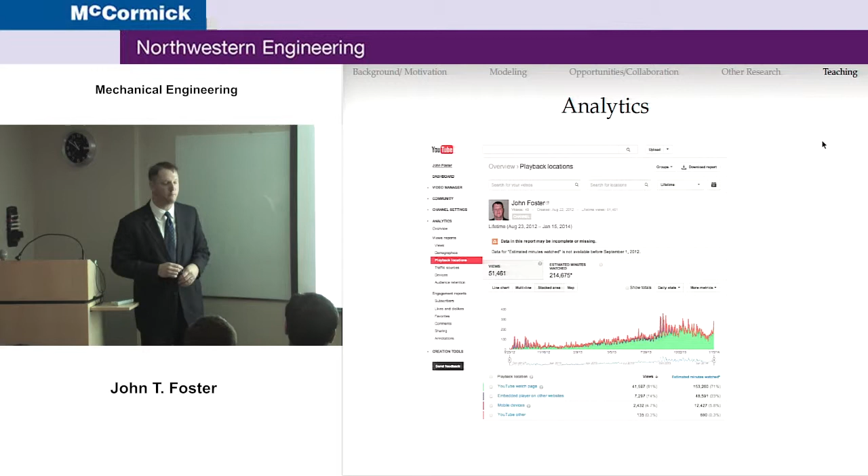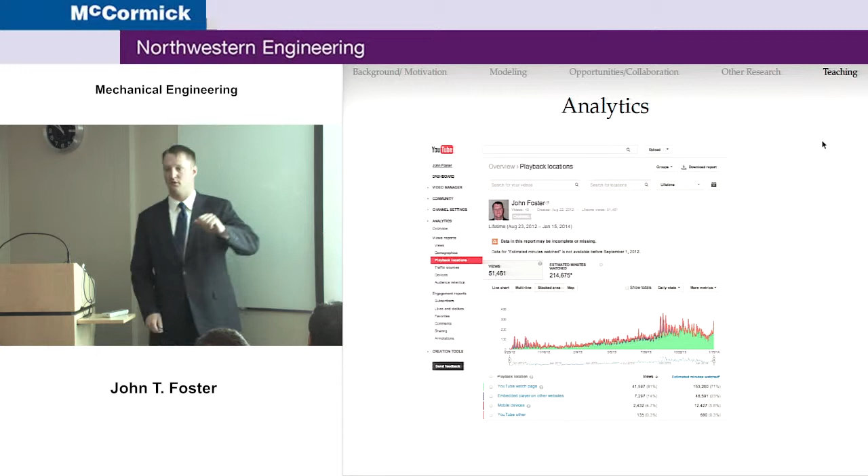And in fact, the Sandia guys got wind of it, and now the Trilinos developers—you've got to remember, Trilinos is one of the core, biggest things, an R&D 100 winner, all this, it's something Sandia is really proud of—now they're going to start using my videos as tutorial content on their website, and I think that's really cool. So, with that, I'll take any questions.